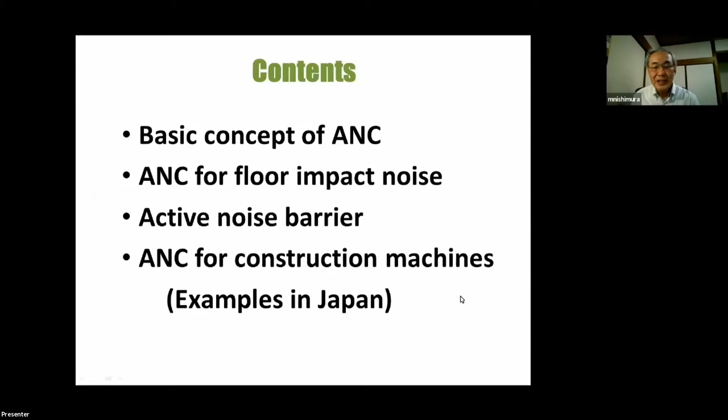At first, the basic concept of ANC. ANC is defined as changing a sound field by actuators like speakers, controlled based on signal measured by sensors, microphones. ANC can cancel the primary sound by the anti-phase secondary sound. It can change the characteristics of sound field, such as damping, resonant mode, etc. And ANC can also change the boundary condition of sound field, such as sound absorption coefficient and transmission loss, and so on.

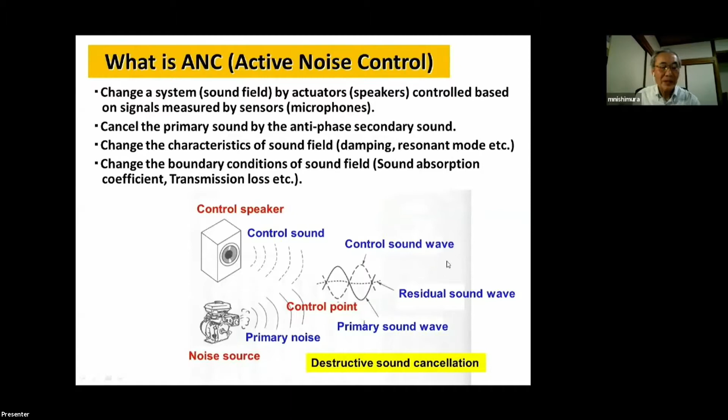ANC is effective for low frequency noise because the controllable zone by one channel system is proportional to its wavelength. Generally, ANC is said to be effective below around 500 Hz, and in higher frequency regions, some passive method is effective.

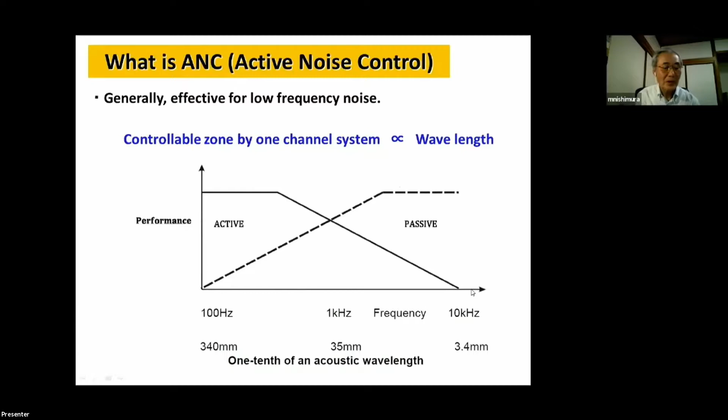ANC has two important points. One is how to realize the anti-sound field, which has the same gain and anti-phase as the primary one, by control speakers. ANC is considered to be superposition of primary sound wave and secondary sound wave. This determines the appropriate placement of control speakers and error microphones.

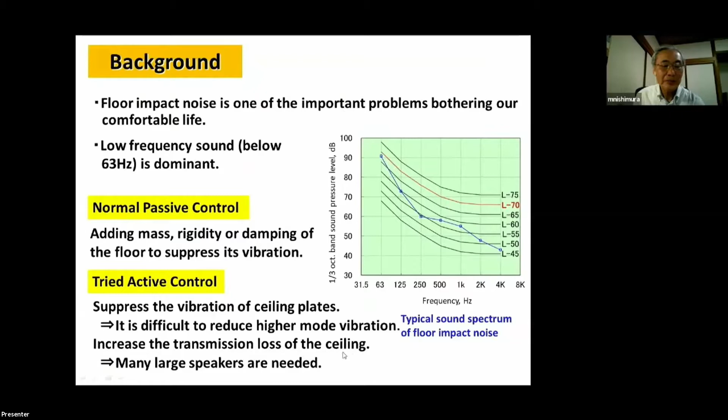The other trial is to increase the transmission loss of the ceiling, like this. This was experimented in Tottori University. In this case, sound transmission loss is increased by reducing the sound pressure between the two panels, which are the upper floor and ceiling, with large speakers. We can reduce the sound pressure in this zone.

As you can see, this graph shows the experimental result. It can reduce the transmitted sound in the low frequency region. This system was proved to be feasible by model test. However, too many large speakers are needed in this case.

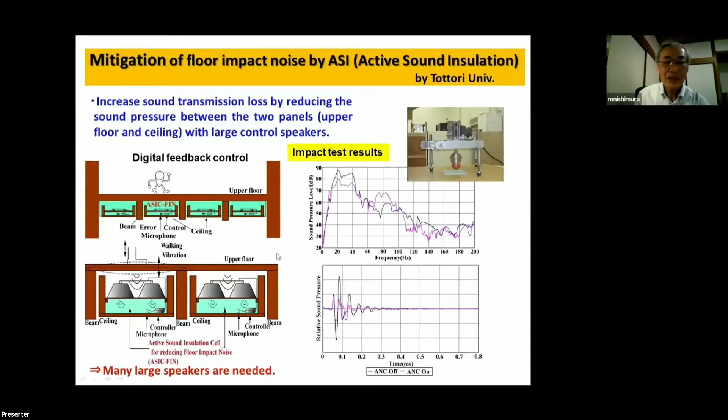Then we tried to mitigate floor impact noise by ANC in the receiving room. Here shows a typical sound spectrum of floor impact noise in the receiving room. As you can see, there are many peaks in the low frequency region. These peaks are caused by the acoustic resonance in the receiving room.

In the case of steady noise, these resonant noises can be easily reduced by ANC with feedback control. So the issue is: is this ANC technique applicable to impact noise?

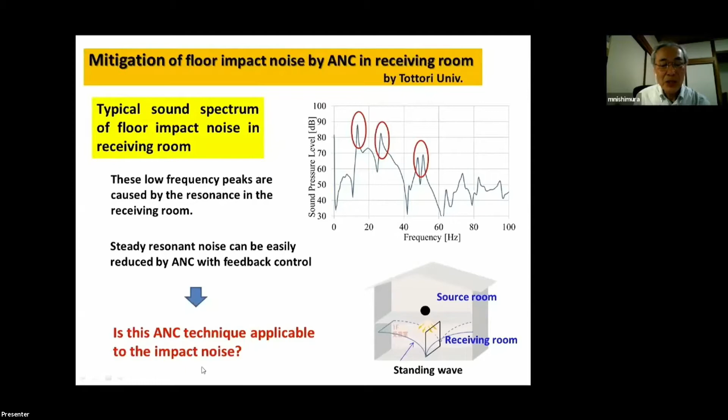We conducted some experiments using a floor impact test room. The receiving room is 4.35 meters wide, 7.5 meters long, and 2.7 meters high. Walls are made of concrete with thin sound absorbing materials.

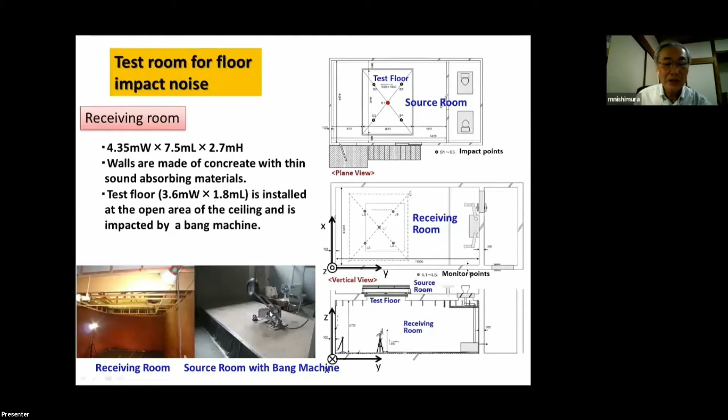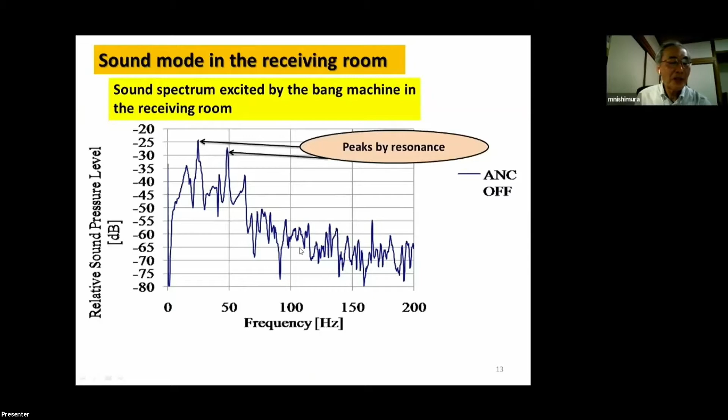This peak of 22.5 Hz corresponds to the first mode in the receiving room, 010. And this peak of 45.2 Hz was found to consist of two modes, 110 and 020. The eigenfrequencies of those modes are very near in this case.

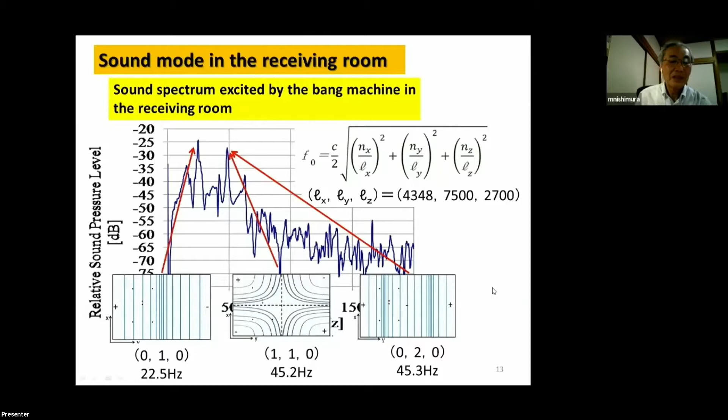This slide shows the test condition. Four control speakers and four error microphones are installed at the four corners on the floor in the receiving room, and a 4x4 feedback LMS algorithm were applied. The sampling frequency is 3 kHz. It's rather high, aiming for rapid convergence. And the control filter is fixed after adaptively converging.

Noise reduction is evaluated by the average value of peak average spectra of 5 times of impact at 5 monitor points. This photo shows a control speaker and error microphone here.

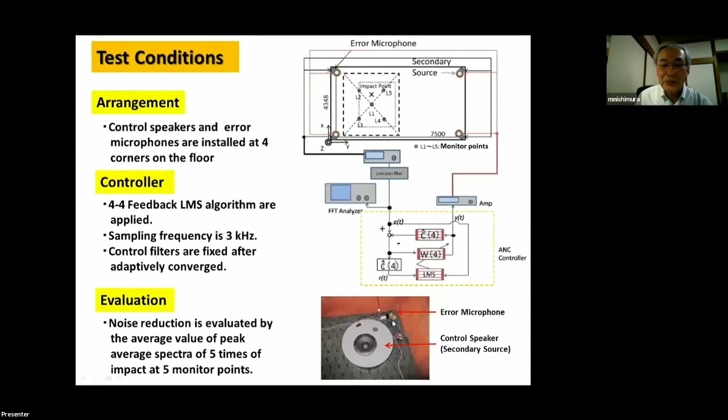This shows the sound wave pattern of the impact noise. ANC off is the blue line and the green line stands for ANC on. As you can see, reverberant waves are rapidly reduced by ANC. This effect seemed to reduce the noisiness of floor impact noise.

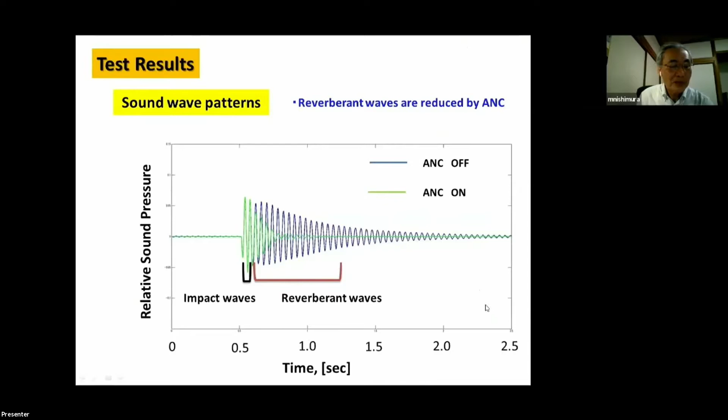This is the evaluation chart of floor impact noise. In this case, the band noise of 63 Hz was reduced by 3.5 decibels with ANC, and the rating of floor impact noise is improved from L70 to L65.

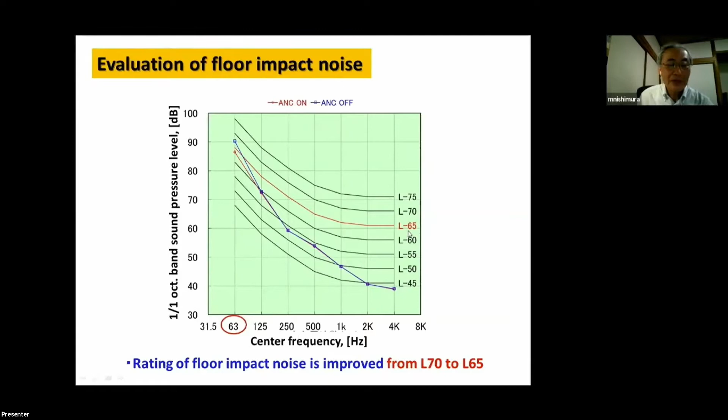In conclusion, for floor impact noise: generally, floor impact noise has high intensity peak spectra at resonant frequencies of the receiving room. Those peaks can be reduced by ANC in the receiving room. Multi-channel feedback LMS algorithm is effective for reducing reverberant sound waves of the floor impact noise. As a result, the rating of floor impact noise was improved by 1 rank.

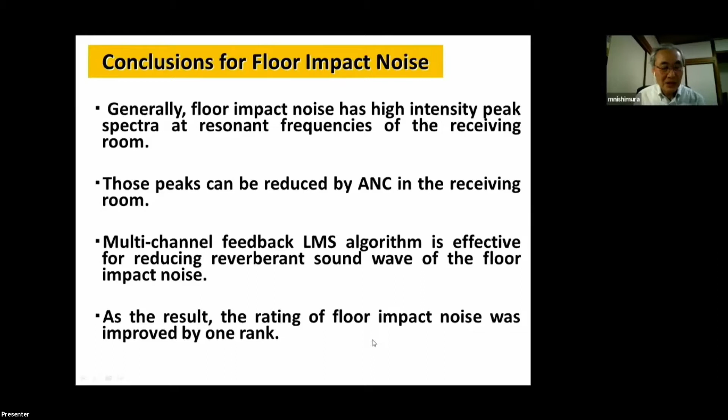This system concerns only sound pressure at the surface of ASE. It does not concern the direction from where the sound propagated. As a result, diffraction sound is reduced. It is effective not only for a stable single sound source, but also for multiple moving sound sources.

In this case, 2 AAT cells are installed in one section. Each AAT cell is controlled individually by an analog feedback controller. In this case, the flow resistance of the facing sheet is very small, and the sound reflection coefficient becomes -1. That means sound pressure becomes 0 at the surface of ASE. We call it an acoustically soft condition, so we call it active soft edge.

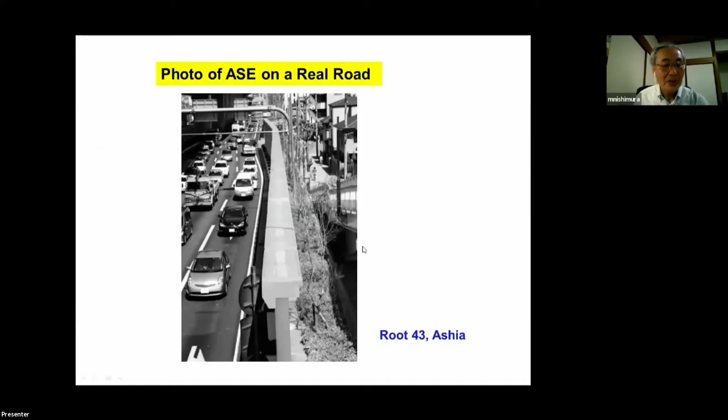ASE uses an analog controller, but advanced active noise barrier, AANB, which uses a high-speed digital feed-forward controller, has already been developed.

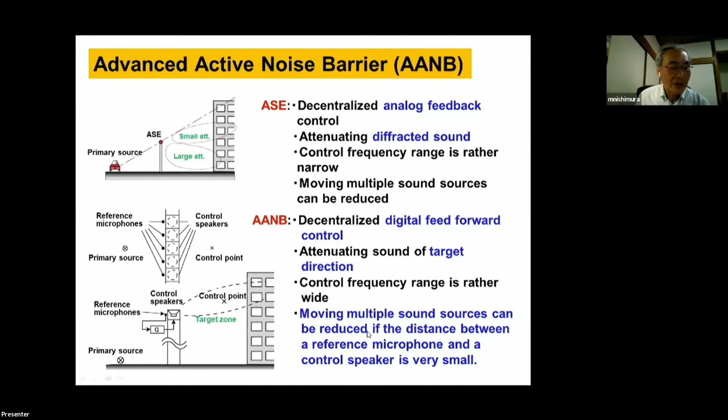Active acoustic partition, AAP, is one of the applications of AANB. In this case, active noise control of dual direction is necessary.

We performed a basic experiment in a normal room. Four sets of control speakers were installed in an array on top of the partition. Every set of control speakers has one reference microphone on each side, so there are totally two reference microphones in every set.

Four error sensors were set on each side, and they were only used during convergence of the control filter. A double 4(1-1)-4 feed-forward control algorithm was applied to converge the control filter. The control filter was fixed after convergence, and the error microphones were removed.

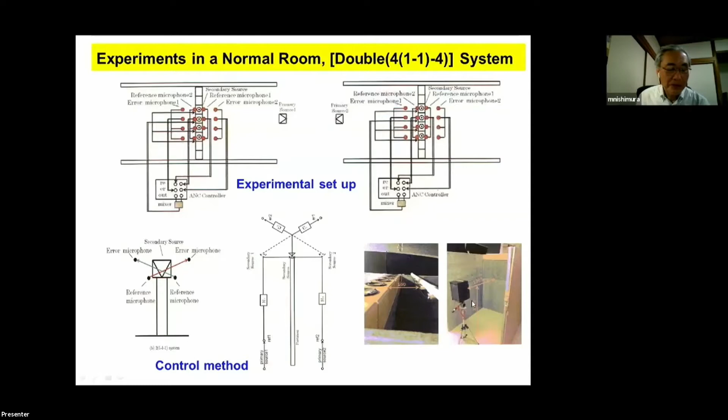Finally, I'd like to introduce some examples of ANC for construction machines in Japan, very briefly.

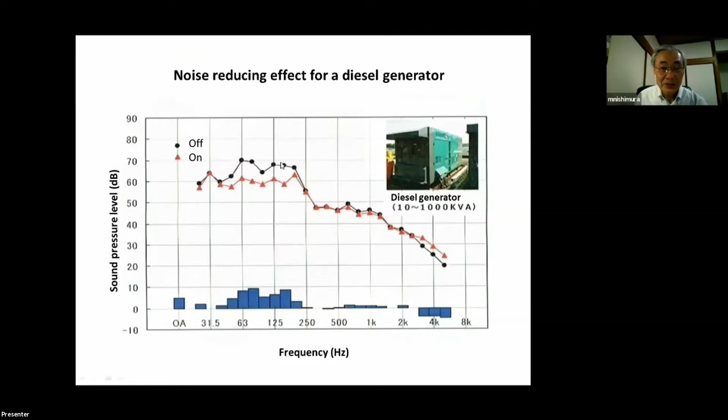This slide shows ANC for engine exhaust noise of a construction machine, produced by INC Engineering. In this case, the exhaust duct is installed to the cover duct, which has a control speaker and cooling fan. The exhaust noise is reduced inside the cover duct by feedback control.

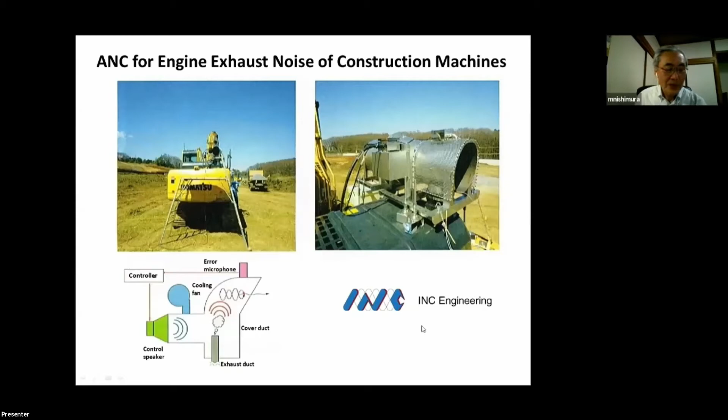Here shows the noise reducing effect. You can see the combustion noise is reduced remarkably by ANC here.

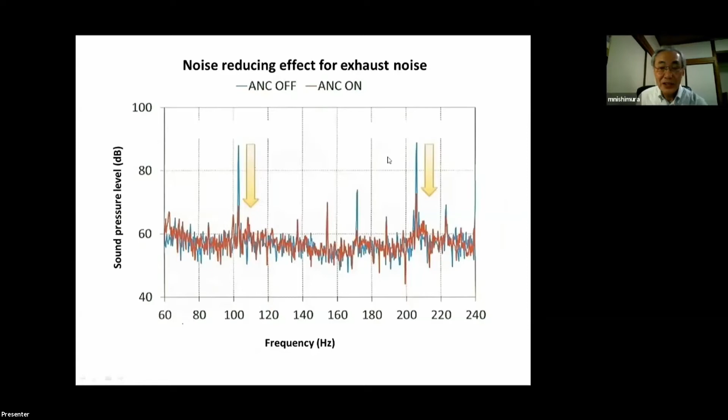This is also ANC for engine exhaust noise of a construction machine, produced by Toda Corporation. It's called the tank system. In this case, the duct exit of the control speaker is set near the exit of the engine exhaust noise, the engine exhaust duct. This system is also controlled by a feedback controller.

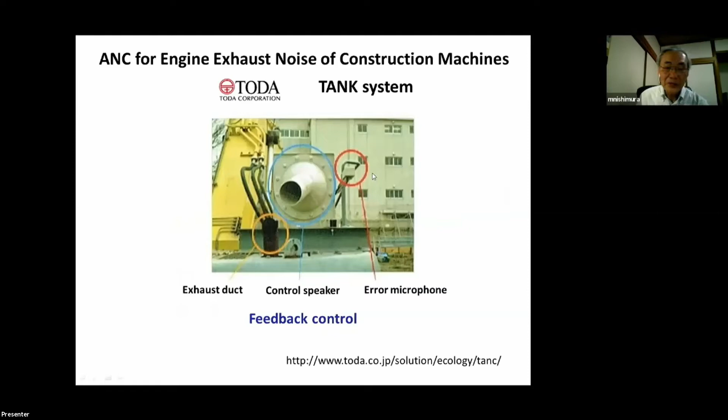This is a dual speaker system. These are the exit of the control duct, and this is the exit of the engine exhaust duct.

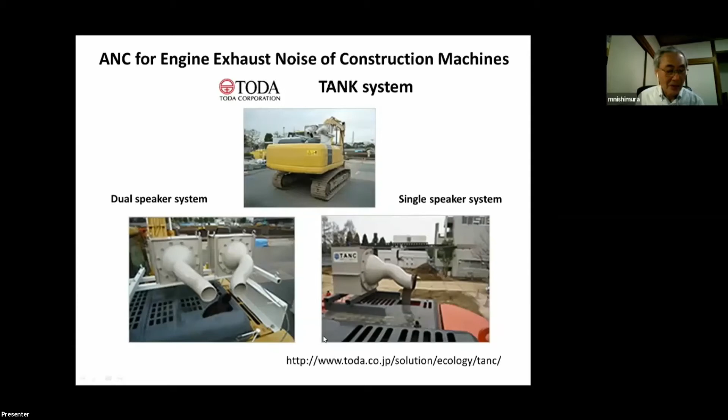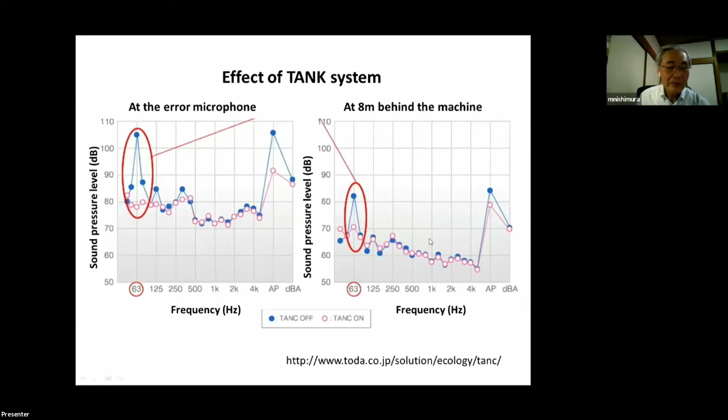Okay, that's all for my presentation. Thank you for your attention.

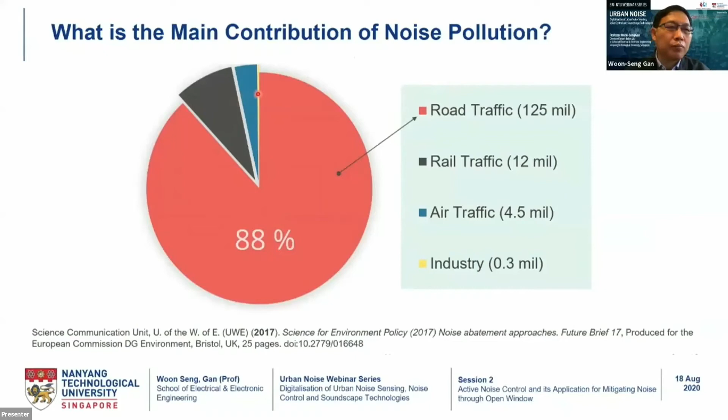It's also interesting to see several recent article headlines starting to equate ambient noise to secondhand smoking. So people are now taking noise exposure more seriously, and there's a growing concern about noise pollution in our urban environment.

The best approach, whenever possible, is to reduce the noise emitted by the source. Improvement in source design can achieve a significant reduction in emitting levels. As an example, for traffic noise, design improvement can be made to automobile mufflers or changes to traffic pattern controls. The noise path can be addressed through structures such as berms or noise barriers.

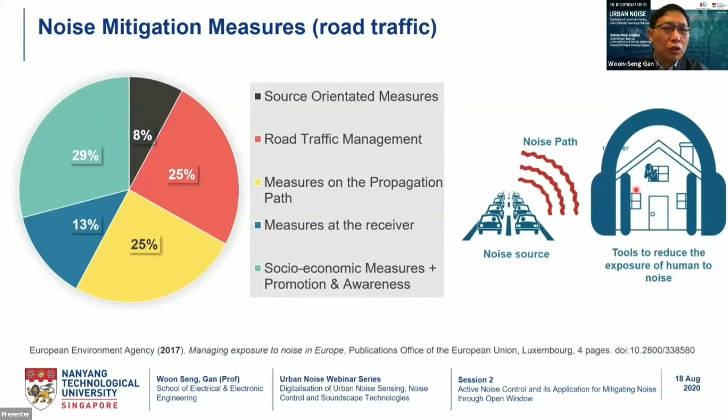The usual measures in high-rise residential buildings may not be that effective, as noise can be diffracted over the top of the barrier, adversely affecting those staying in the upper floors, or some lower frequency noise can penetrate through the barriers. Simply increasing the height of the noise barrier will block out natural ventilation and light into the lower floors of the residential building, and may not be a cost-effective solution.

So finding a suitable and practical solution for controlling noise into naturally ventilated buildings is a challenging problem. Our proposed approach takes into consideration the following: first of all, in the context of urban high-rise situations, we propose an approach to control noise at the receiver end.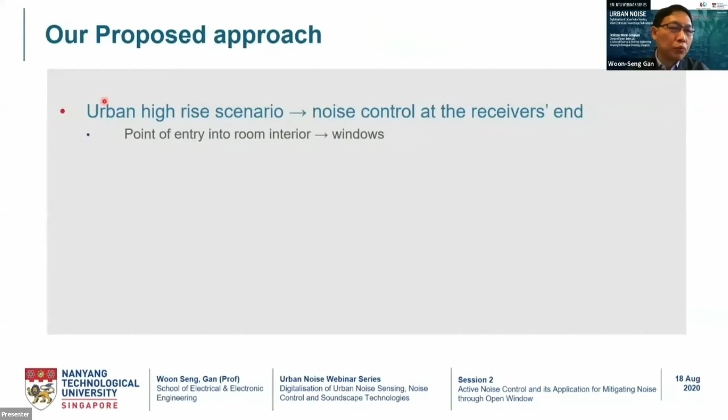Targeting at the point of entry of noise, which is the open windows. Second, it's known that active control solutions using the principle of superposition are only effective at lower frequencies, and most of the traffic noise energy is in the lower frequency range below 2000 Hz.

However, this proposed strategy should also maintain the window functionality, especially for natural ventilation and access to natural light.

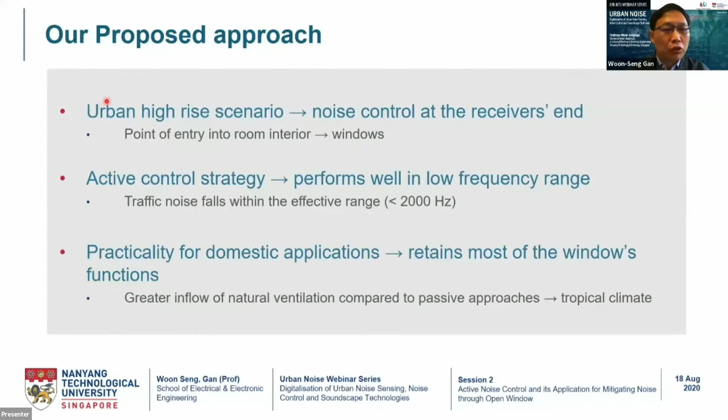So how does this type of active noise control technique, which is used in our earbuds, scale up to active noise control windows? I will showcase some of our recent R&D prototypes developed in NTU and the latest published results in this talk.

To start with, why digital active noise control? Digitization of sound signals provides us with immense flexibility in manipulating and analyzing the sound signal, which would otherwise be impossible to achieve in an analog solution.

If you look at the traditional passive approach of noise control, for example using noise barriers as shown in this diagram, they are considered a passive technique as they only rely on passive material. They are thick, expensive, and work effectively at higher frequency noise, but they are usually large, block out airflows, and are ineffective at low frequency. Earplugs are another passive control example.

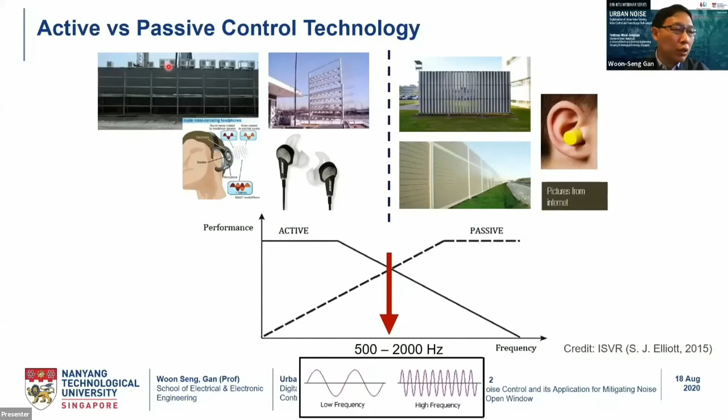In physics, we call this the superposition principle, where sound waves sum up in air. The generated anti-noise must be emitted such that it matches the noise wave in air, both in time and in space, so the timing of when to emit anti-noise and the location to achieve good cancellation is very important for active noise control to work effectively.

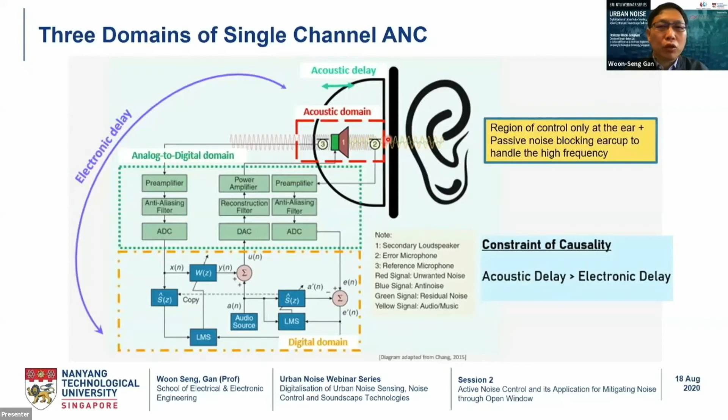It's important to note that ANC headphones only concentrate noise control around the region of the ear. But how do we deal with a much bigger surface of noise control?

For ANC windows, we need to adopt slightly different active control strategies. The complexity of building an ANC window is much higher than ANC headphones, as we need to take care of a larger region. ANC windows therefore require multiple secondary sources distributed across the opening to provide sufficient anti-noise to cancel out noise before it enters the room. The computational complexity is much higher, and higher end processing capability is needed to sample the noise at very high frequencies to meet the causality constraint as explained previously.

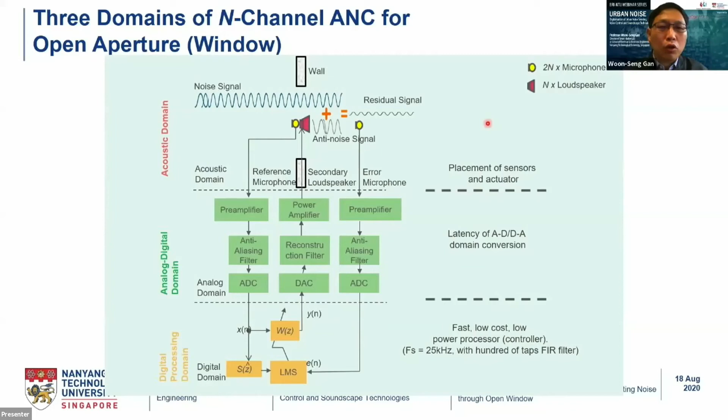For ANC windows, we are basically containing the noise at the window opening and reducing the noise intensity before it enters the room, resulting in global noise control inside the room. So when people are inside, they won't need to wear hearing protectors. The noise reduction takes place at the opening of the windows. Also note that there's no passive material used in the ANC window, as we do not want to compromise on natural ventilation and access to light.

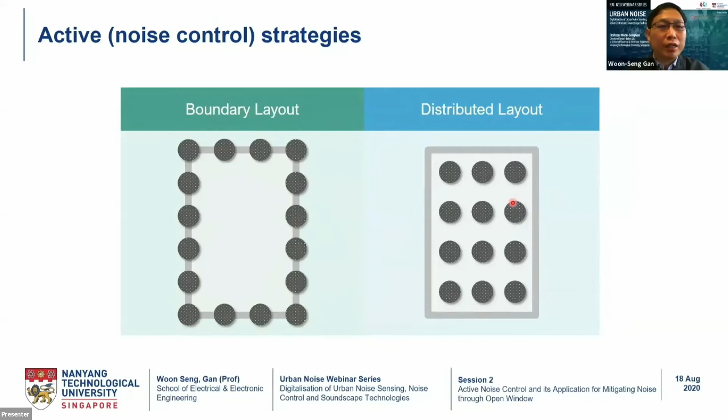There are generally two categories of active strategies for controlling noise through apertures. The boundary layout, shown on the left, has control sources distributed around the entire boundary of the aperture. Another approach is the distributed layout, where control sources are distributed across the entire opening. Today we will focus on the latter active control strategy, based on the distributed layout.

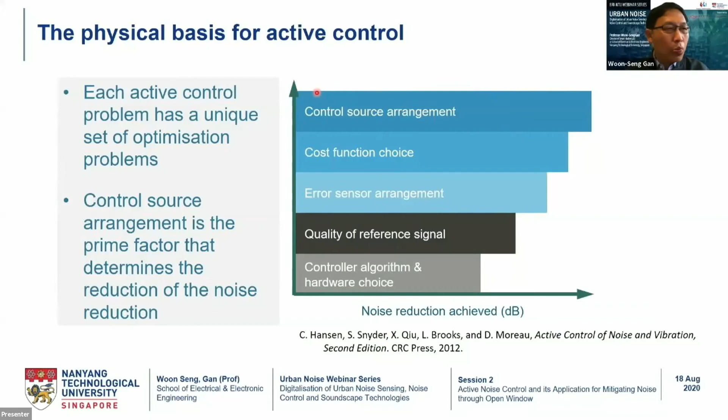We make use of acoustic simulators to help us understand the best control source arrangement for ANC windows. In our work, we adopt a numerical 2D simulator to evaluate the placement of the secondary source. This 2D numerical simulator provides a useful tool to understand how multiple secondary sources behave under different noise fields, allowing us to examine different parameters in determining the effective physical interspacing of the secondary sources, sensors and secondary source placement under different directions of primary noise coming into the windows.

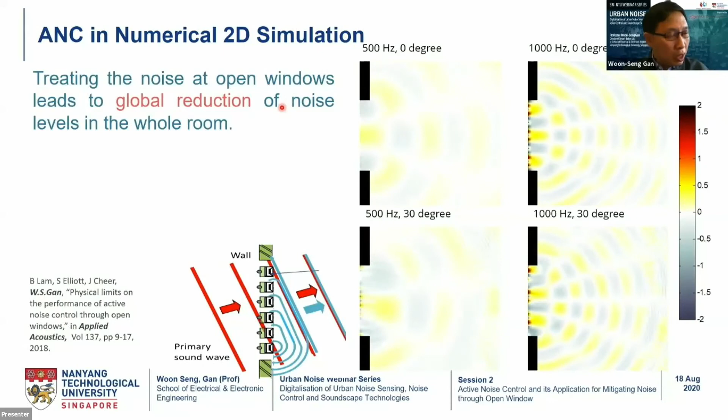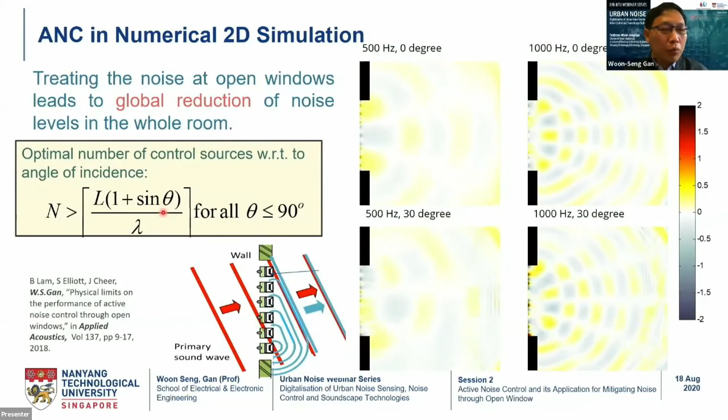Dr. Bhan Lam has been working on this simulation and experimentation for his PhD. His thesis outlines several important equations on how we select the number of secondary sources and their placement. He has derived the optimum number of control sources with reference to the angle of incidence - N denotes the number of secondary sources needed for a window size of L, in meters, for noise coming in from different angles from 0 to 90 degrees. This equation gives us an lower bound on the number of secondary sources required to apply active noise control techniques for windows.

So in order for us to validate the simulation results, a test chamber is built. In this case, we have a test chamber of 2 by 2 by 2 meter cube, constructed and placed into recording studios. A full-size sliding window of 1 meter by 1 meter was installed at the front end of the test chamber to conduct a proof of principle experiment.

So we built a 24-channel active noise control system. These 24 channels consist of 8 rows by 3 columns grids, attached to a grill inside the window, and the microphones are facing outwards towards the noise source. This forms a planar array of control loudspeakers distributed across the entire window. It will emit anti-noise towards the interior of the room at the same frequency but opposing pressure pattern of the incoming noise, essentially cancelling out the intruding noise.

This is the dimension of the secondary source. The secondary source is 5 cm in diameter and with a length of 12 cm.

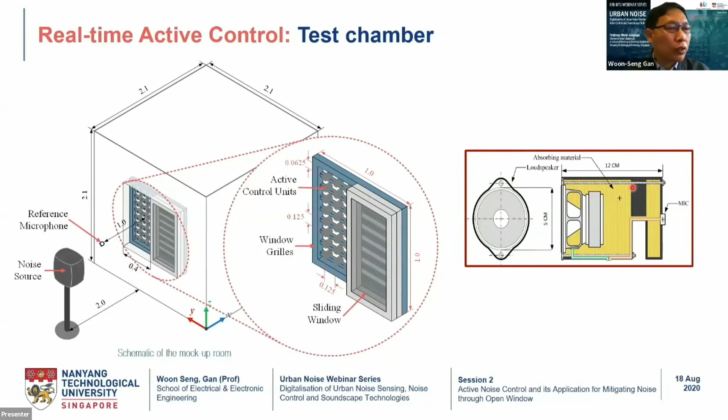This is a photo showing the interior of this 24-channel ANC system. It's attached to a grill, 8 rows by 3 columns. And this is the external view showing the microphone facing outward to receive the advance information of the intruding noise.

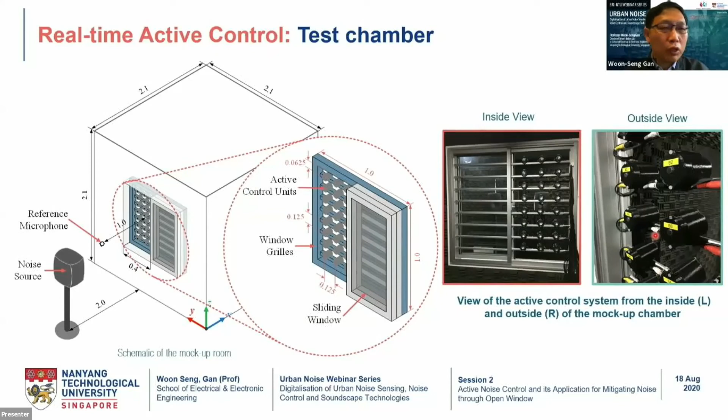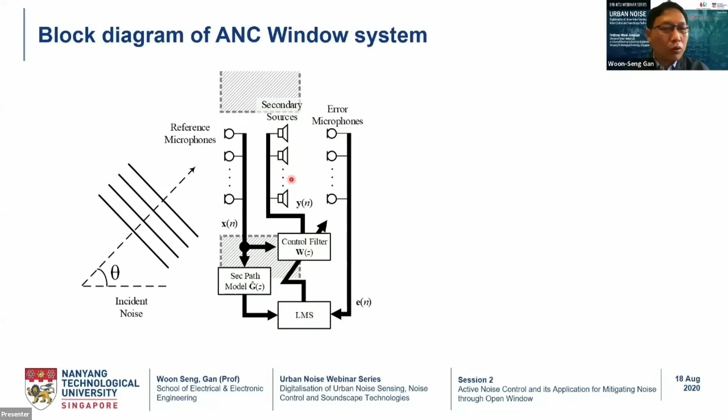A cross-sectional view of the active control system is shown in this block diagram. Noise is impinging from left to right. The reference microphone senses the noise and provides this advance information to a digital controller. The secondary source generates the anti-noise wave to cancel out the disturbance at the error microphones, which provide feedback information to the digital controller so it can adjust the coefficients to match the incoming noise. Ultimately, our target is to achieve global noise attenuation in the interior of the room without obstructing much of the natural ventilation and light.

In order for us to measure the global noise reduction inside the test chamber, 18 microphones are placed at different locations around the interior according to ISO recommendation. We evaluate the energy average sound pressure at the entire room and also the planar average sound pressure around the opening of the window. The left diagram shows the cross-sectional side view indicating microphone heights, and the right diagram shows the cross-sectional top view of microphone placement. Microphones 1 to 12, arranged in a rectangular grid 0.5 meter away from the opening of the window, measure the planar average sound pressure level.

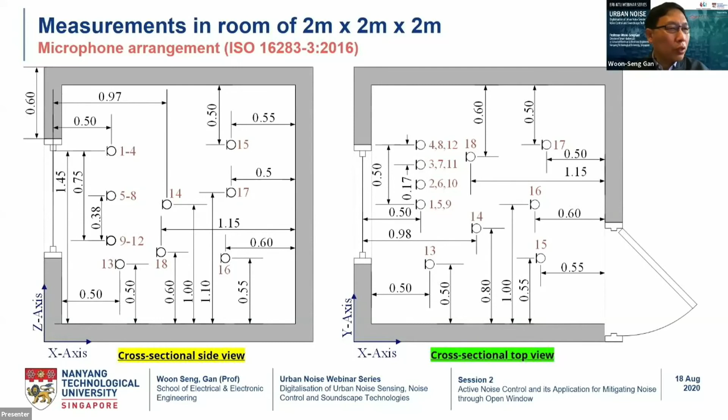Microphones 1, 13, 14, 15, 16, 17, 18 are used for computing the energy average sound pressure level inside the room. Let me show you some results after the measurement. This table shows the energy average sound pressure level highlighted in red and the planar average sound pressure level highlighted in blue, based on the selected microphone arrangement shown in the previous slides.

We tested the ANC for broadband white noise, highway noise, train noise, and aircraft noise, with a frequency range from 100 to 1000 Hz. We compared this ANC performance with passive attenuation from a fully closed window. We can see there are some 2 to 5 dB of noise reduction difference between the ANC window and the fully closed window.

We also note that the ANC window can achieve 7 to 10 dB of energy average sound pressure level reduction, as well as 8 to 11 dB of planar average sound pressure reduction. Since the difference between the average and the planar is basically less than 1 dB, global attenuation was achieved in the room interior. Effectively, there's little difference between the noise reduction performance at the opening of the window and the interior of the room.

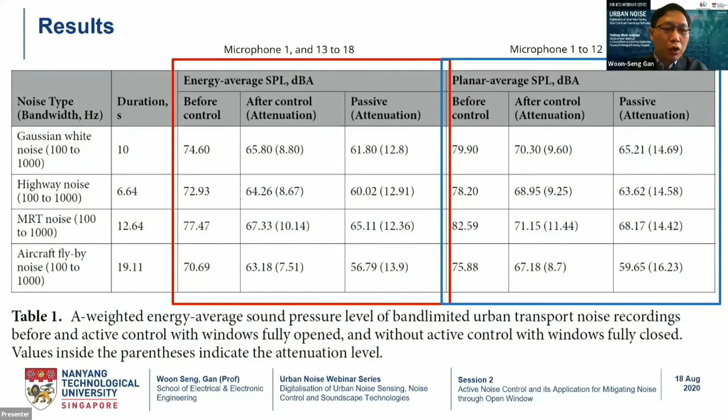So our ANC system was effective from 300 to 1000 Hertz. This range encompasses most of the traffic and train noise, although the small speaker we use limits the mitigation of very low frequency below 300 Hertz.

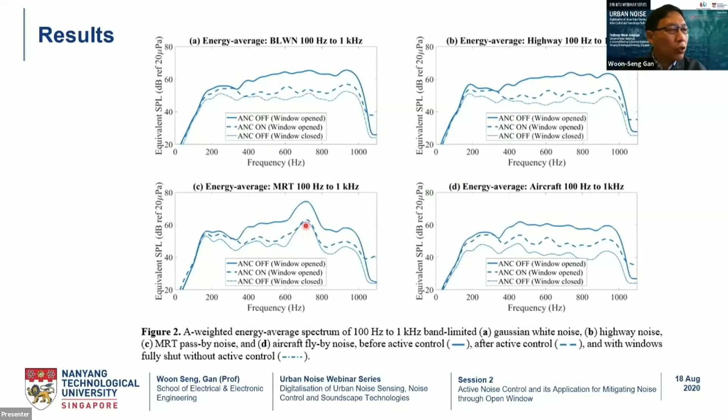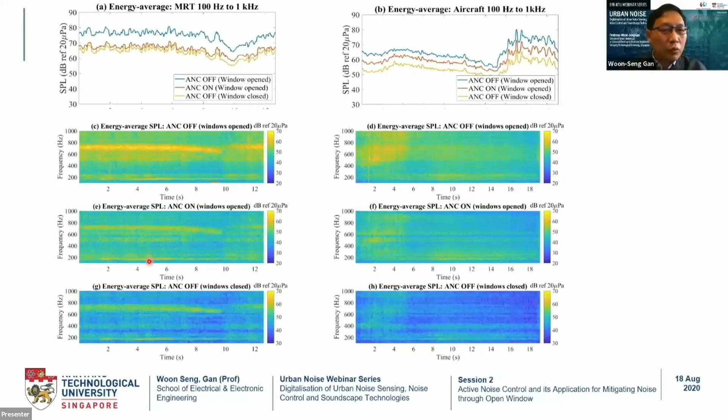To further investigate the performance of the active noise control system, we use acoustic cameras with calibrated condenser mics to measure the real-time performance of the noise reduction. The measuring device allows us to understand the spatial noise reduction across the window opening.

Please note that the open window is located at the right-hand side. This is the open window. And the one on the left-hand side is completely closed, as this is a sliding window setup.

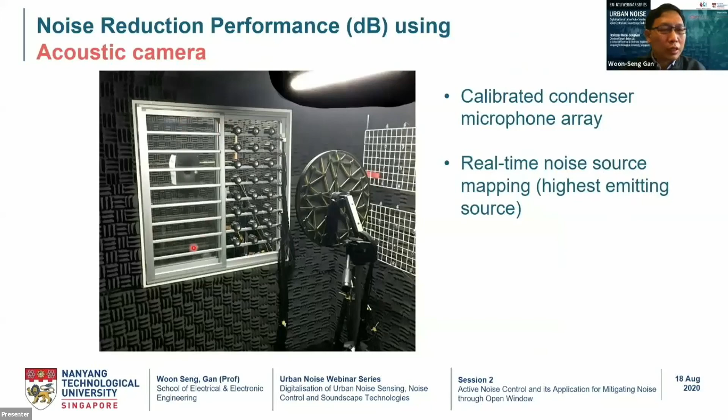This video shows the acoustic camera in action when the ANC system is turned off and the band-limited noise from 400 to 1300 Hertz is generated from outside the test chamber. Let me play this video.

You notice that the sound pressure at the opening is around 65 decibels. The acoustic camera basically pinpoints where the majority of the noise energy is coming through the opening windows, denoted by the lighter white and yellow patch over here.

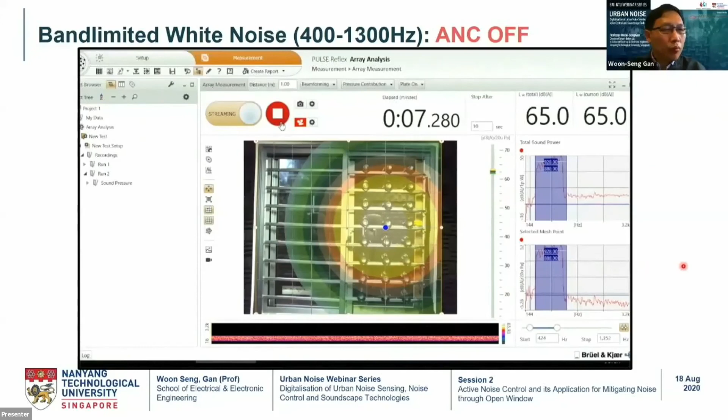So now, when we turn on our ANC system, we will see what happened. Notice the sound pressure level now drops to 55 decibel, a drop of 10 decibel.

With the higher intensity now appearing at the edge of the windows, it's no longer the majority of the noise intensity coming from the center of the window. It has been greatly reduced by 10 dB.

Next, we look at some of this non-stationary noise, a train noise coming with a frequency range of 400 to 1,200 Hertz. Now with ANC off.

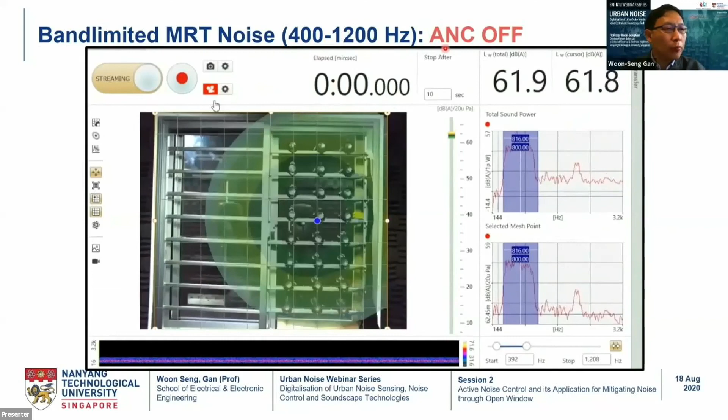Again, the majority of noise intensity is coming through the open windows on the right-hand side of the windows. Now, let's look at ANC on.

You notice that the noise in the center of the window has now reduced quite significantly to only 55 decibel. And the majority of the noise is now coming not through the open windows, but at the side near the closed windows.

So let me conclude my talk by giving some of the key takeaways. First of all, I would like to highlight the limitations of noise control in the ANC windows.

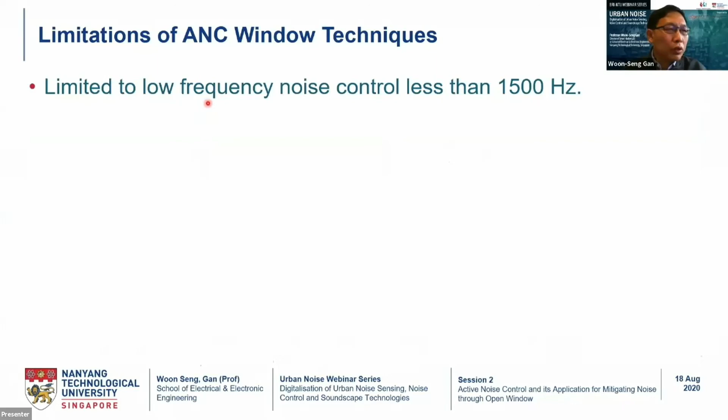It's limited to low frequency noise control, less than 1,500 Hertz. The absence of ANC control below 300 Hertz is primarily due to the implementation of a small loudspeaker array as the secondary source.

We do not want to use larger speakers so as not to block out the vision, and we also want to minimize the impact on natural ventilation.

So we will need to distribute this secondary source across the opening of the windows, and at the same time ensure natural ventilation will not be greatly compromised. It also requires high-speed processors and low latency electroacoustic components for us to implement this ANC system.

Finally, ANC Windows is not a silver bullet for controlling all the different types of noise that comes through our windows, just to take note, okay?

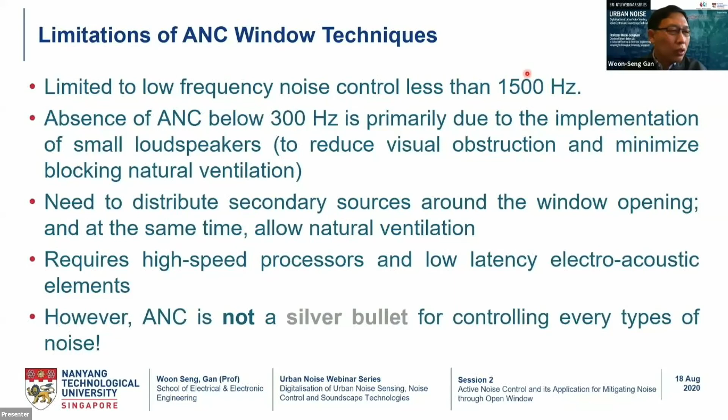In conclusion, we have successfully demonstrated and reported a proof of principle study in Nature Scientific Reports. We have successfully reduced the volume of noise transmitted through an open window, as seen from the experimentation results and videos.

We have a reduction of 10 decibel, which is significant because it reduces the loudness by half, and this has been achieved in both the space and time average sound pressure level.

With the advance of powerful processing units, low-cost sensors and actuators, and advanced signal processing and AI techniques, we are seeing that digital ANC technique is becoming a viable tool to reduce urban noise.